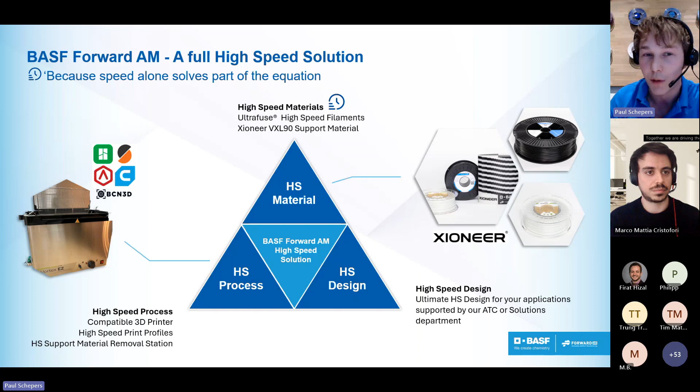And to relieve you, we develop customized print profiles, including customized high-speed print profiles. They're more or less the recipe for your printer to high-speed print the material. That is what we think is a full high-speed solution, because speed alone only solves part of the equation. You need all three pillars.

As already mentioned, today we are going to talk about the ultimate functional PLA, Ultrafuse PLA Tough. The two main UVPs of this product are toughness and high speed. I want to introduce you to those two properties: what is it, how do we evaluate it, and how could it be utilized by you, the customer.

First, toughness. Toughness is actually the resistance to fracture, reflecting how well a material resists cracking or fracturing. If you look at material properties, it could be described by two basic properties: strength and ductility. Strength refers to how much force a material can withstand before it breaks, and ductility is the material's ability to bend and deform without snapping.

So how do we measure it? You see the icon, the hammer, showing impact, and this is how we more or less measure it. We use ISO standard tests, like a Charpy or an Izod test, in conditioned environments, and we move this hammer and smash it into a sample of printed material, then record the measurement. This gives us the amount of energy absorbed by the material before it breaks at the notch, for example a notched or unnotched material. This is how we measure impact toughness.

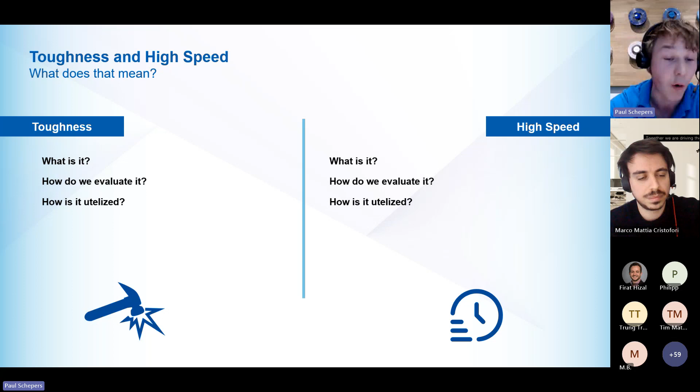Just to record it once again, this icon, when you see it on our Ultrafuse products, means it's able to print at a throughput of at least 8 cubic millimeters per second. But as technology evolves, printing speeds may become even higher, since it's also related to the equipment utilized during the print. We're also looking at the surface quality and mechanical performance of this material when printed at high speed.

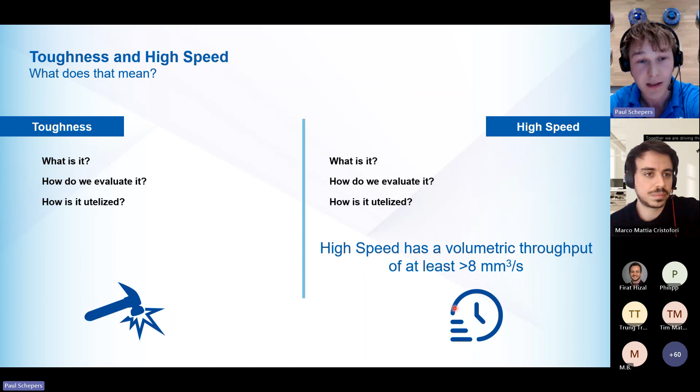So Ultrafuse PLA Tough - why did we develop it? If you have PLA and an ABS material, both have a unique set of properties. PLA is an easy to print material, and ABS has quite some toughness, but they also have some weaknesses.

PLA in general tends to be brittle, meaning it snaps and fractures quite easily. ABS is very tough, however it could warp or delaminate, and it's also fossil based, whereas PLA is bio based. So we wanted to close those two gaps with Ultrafuse PLA Tough, because PLA and ABS together are the major market in FDM.

So what are the superpowers? Ultrafuse PLA Tough is a highly versatile, biocompatible and bio-based material. It's easy to print with, a sustainable and cost and time saving production, especially for large but also fine detailed prints. It's quite suitable for functional applications for beginners, but also for seasoned 3D printer experts.

So what are the 8 superpowers? As already mentioned, it's tough - really tough, with an impact resistance of 34 kilojoules per square meter. We can even enhance those superpowers by annealing it. How does it relate to standard PLA? It's 720% tougher than a standard PLA.

I already talked about high speed - this material can print at this moment with current equipment up to 300 millimeters per second, and maybe with newer technologies it can go even faster.

But it is also biocompatible, meaning it's safe to use on the skin. We've done all kinds of tests to evaluate if there are any allergic reactions, and we have a statement about this. Besides this, it's also crucial that the part looks good - it's aesthetic and visually appealing even when printed at higher speeds. Then there's the heat resistance.

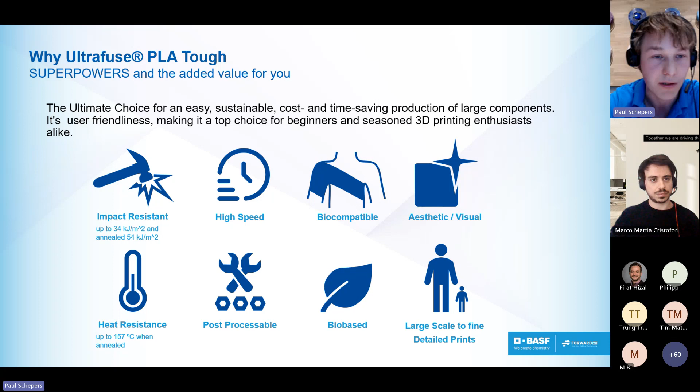It's also post-processable, for example CNC milling, easy to sand, and you can also coat or paint it. It is a bio-based material because PLA, polylactic acid, is derived from corn. It can be used for large scale to fine detail prints. So these are the 8 superpowers, and those add value to you.

Just to summarize, it's 720% tougher than standard PLA. The PLA Tough is able to print at higher speeds with a volumetric flow rate up to 24 cubic millimeters per second, suitable for skin contact, and has a high success rate printing complex geometries, large-scale prints, and fine details.

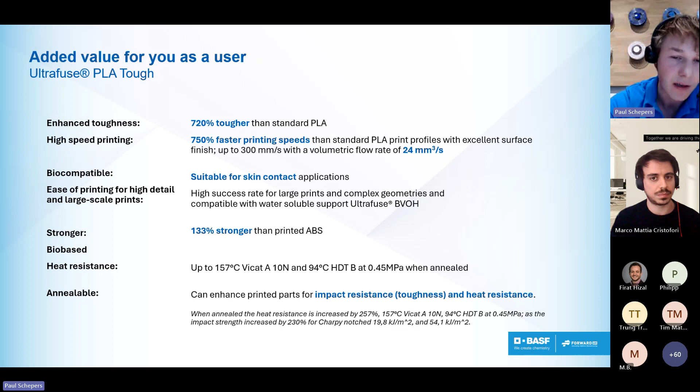It's stronger than ABS, 130% stronger, and it's bio-based. And we can anneal it to enhance its superpowers. Let's look a little bit closer at how this annealing process looks.

When you're printing a part, you print one material next to another, layer on top of each other. What actually happens during this printing is that you get internal stresses built into the design.

So what happens when you heat it? You can anneal the polymer material by a heat treatment that involves subjecting the polymer to a controlled heating and cooling cycle. During this cycle, the internal stresses can be relaxed because the crystals and polymer chains can position themselves in a more favorable state. Because they are in a more favorable state, the properties also enhance—mechanical properties, wear, and thermal properties of the material.

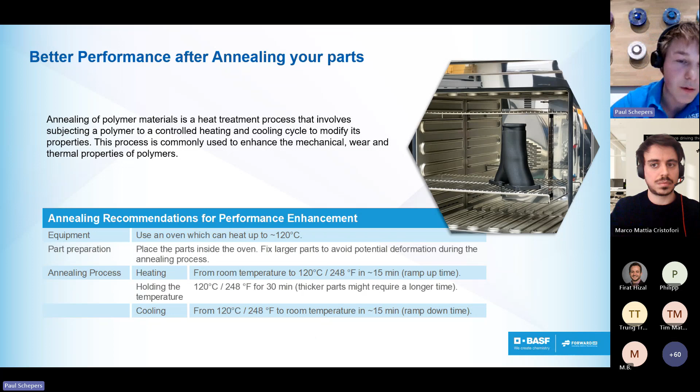We have evaluated this on a particular specimen, and you can look in the technical data sheet for more details about the annealing procedure. So let's look at how these properties are enhanced by annealing it.

On the left, you see how we enhance the thermal properties. In light blue is unannealed PLA Tough, and in darker blue, annealed PLA Tough. For example, at a load of 10 newtons, normally it has heat resistance of about 60 degrees Celsius, but annealed it can resist 157 degrees Celsius—that's almost 260% more. That's a huge increase in thermal properties.

But toughness can also be increased. If you look at the notched and unnotched materials, for the notched version it's about 230% more—a significant increase.

Of course, is it only the superpowers that we can enhance? No, that's not all—there's also a small setback, but one you can control. During annealing, in the different orientations you get a shrinkage or increase in dimensions: shrinkage in the XY orientation is about -1%, and in the Z orientation it's 2%. In the design of your model, you can already account for this shrinkage rate and compensate for it, so the final dimensions of your part are reached after the annealing.

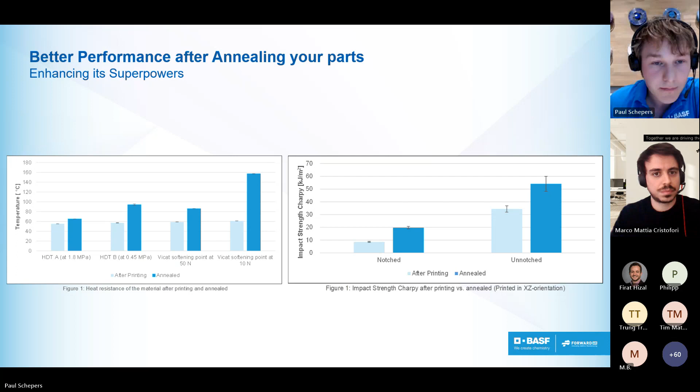So how to choose the right type of material? For those who are aware of our portfolio, you've seen that we offer multiple PLA products and also an ABS. I want to give you a rule of thumb for how to select the right material for your application.

If you want a standard PLA, we offer it for affordable, easy, and colorful 3D prints with no warping, ideal for basic projects and beginners. If you need high speed and excellent surface quality, we advise Pro 1, for top tier 3D printers that demand the best aesthetics. It's slightly tougher than PLA but the fastest to print with no warping, ideal for premium projects. It's also biocompatible and for professional users.

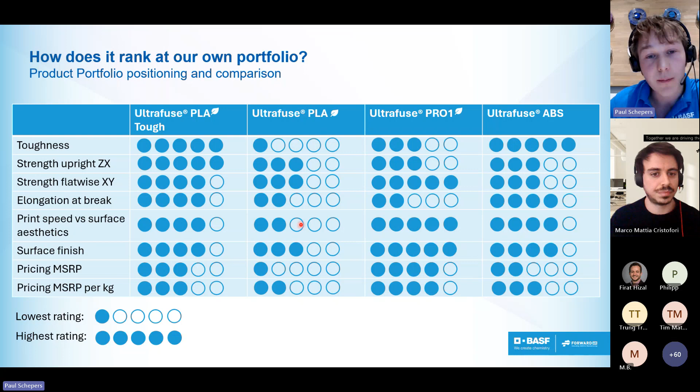Then we have ABS. It's as tough as our PLA Tough. However, if you think about the environment, PLA is a bio-based product and ABS isn't. Furthermore, ABS emits styrene emissions during printing while PLA Tough doesn't, so it's the more sustainable option. You could position PLA Tough between the Ultrafuse PLA and the Pro 1 - it's a more affordable option that gives you all the benefits of an ABS.

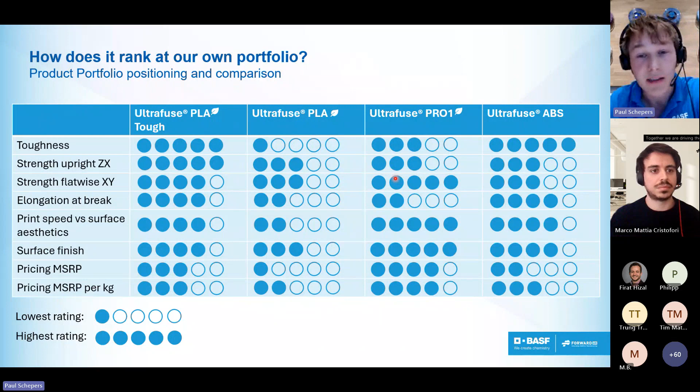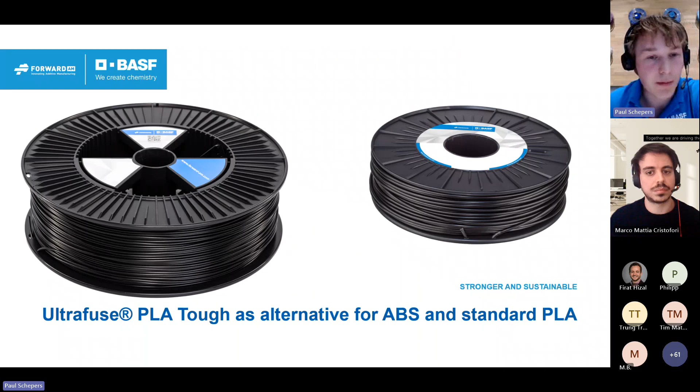Let's have a deep dive into the material properties. What you see here is a spider graph of properties. In general, the larger the surface area of a particular property, the better it is for certain applications, although it depends on the final application field. But in general, the larger the area, the better it's performing.

In blue, we have PLA Tough. We know that PLA and ABS both have limitations - PLA is quite brittle, and ABS isn't the most suitable material if you think about the environment or want to print without styrene emissions. One of the most crucial factors in FDM printing is that if you want very strong parts, you don't want delamination, which occurs quite often in the Z orientation. What you see is that for both PLA, in green, and ABS, in black, PLA Tough is outperforming it, and that's quite unique because that's generally the weakest link of your print.

And if you look at the impact tests, you see that it's outperforming ABS as well - sometimes it's quite close.

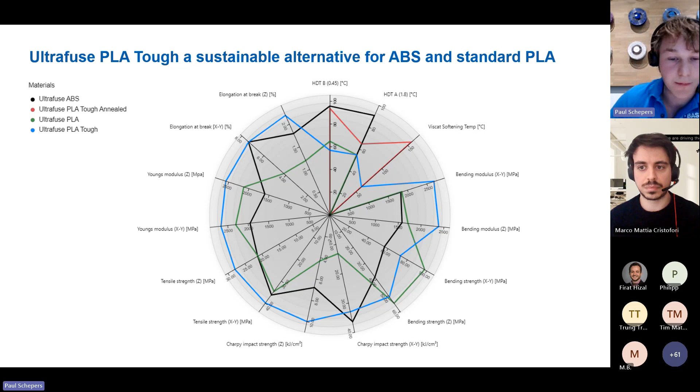Now we come to the topic of presenting some use cases. Although we have many use cases for PLA Tough, unfortunately due to non-disclosure agreements we're not able to showcase them all, but we can show something.

Before we start, I want to share how you as a user can already feel the toughness of this product. When you have the filament in your hands, you can already see and feel it. This is a colleague demonstrating trying to break the filament. For those used to working with PLA, they know how easy it is to break - I sped it up 5 times and you see it's not that easy. You can think about it in a different way too.

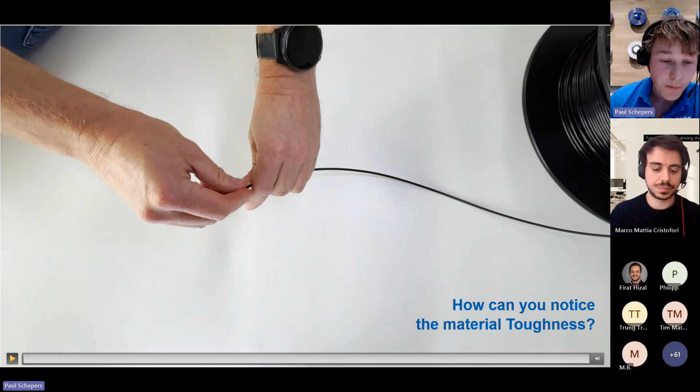In the past slide you've seen the spool sizes from 750 grams up to 8 kilograms, and those big spools are quite heavy. Where do you use these very large reels? Generally for very big, large scale prints. If you need to pull the filament from this heavy spool, you don't want it to snap, especially for a print that takes several days. If it snaps during the print, you may need to print it again. With PLA Tough, it gives an extra piece of reliability that it will not snap during these higher consuming materials in big, large scale prints.

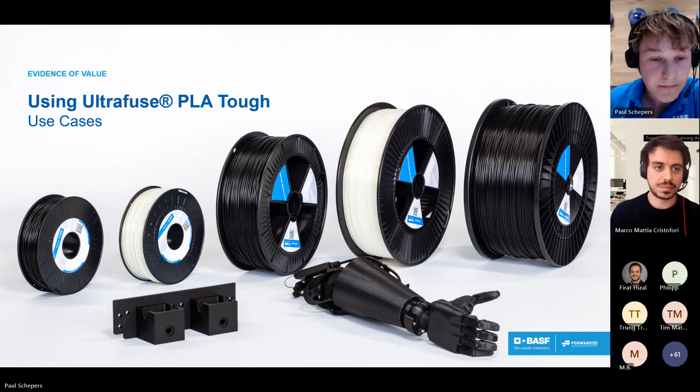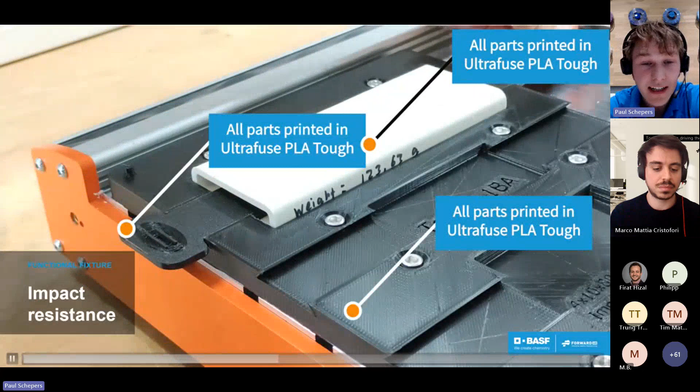So the impact resistance - this is a problem within the company that the material solves. It is a functional fixture, an internal use case where hundreds of parts are CNC milled out of PLA Tough to evaluate material properties. To clamp the parts into the fixture, my colleague hammers wedges into this white PLA Tough substrate to ensure the part won't move during milling. Both the fixture and the wedges are fully operational today, even after hundreds of clampings and hammerings, and they'll continue serving us for a long time.

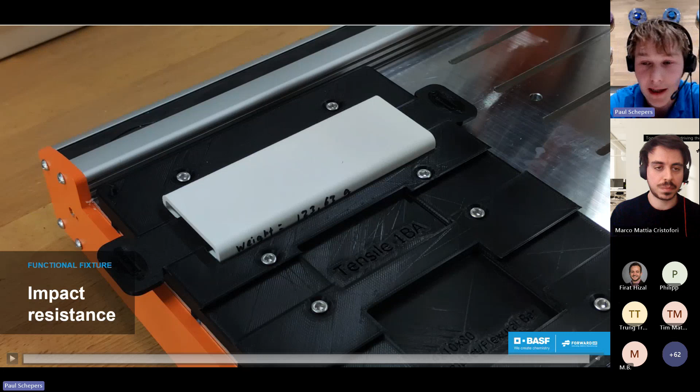And did I mention that PLA Tough is very easy to post-process, like for example CNC milling? It is.

This is a beautiful application from the Victoria Hand Project, a Canadian charity that uses 3D printing to create affordable prosthetic arms for people in need worldwide. Victoria Hand focuses on reaching areas where traditional prosthetic care is limited due to high cost or lack of resources, so their 3D printed prosthetic hands are functional and accessible. For example, the war in Ukraine has left many grappling with devastating injuries, and they support those locations with material, training, and printers so prosthetics can be printed on demand. Victoria Hand helps recipients regain independence, hope, and opportunities to live a happier and more fulfilling life.

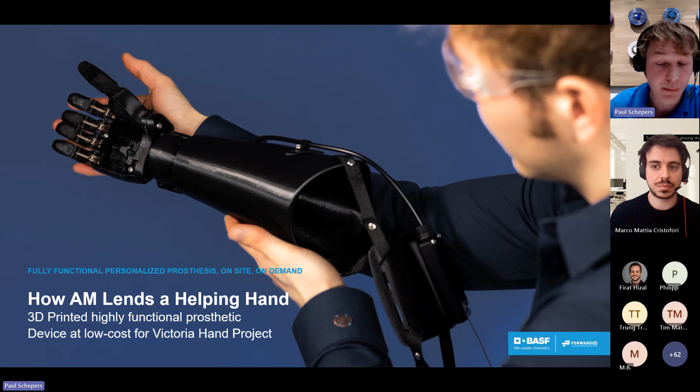This is an example of how a prosthetic is used. Victoria Hand has two main challenges: because they print on demand locally, they need an easy to print material, so PLA Tough is suitable. But it also needs to be durable and strong because it must withstand the daily load cases of everyday wear and tear - from household routines like cooking, cleaning, or grasping an item, like picking up scissors from a table, to playing sports where the prosthetic needs to withstand loads from bumping into somebody. So it's crucial the material is durable enough to handle these activities without breaking or wearing down too quickly.

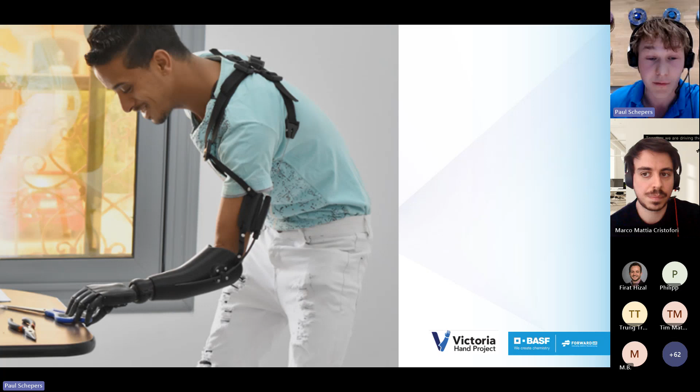Let's have a closer look at these functional applications, because it is the ultimate functional PLA. On top you see a functional design of a rotatable thumb. This rotation achieves different positions, allowing it to grasp different objects from a table.

Then there's a backlock mechanism that lets the user lock the hand to close something - when you click into this backlock mechanism, the hand can hold an item. There's also a composition of multiple materials: you see screws inserted into the PLA Tough, and chains combined with metal parts.

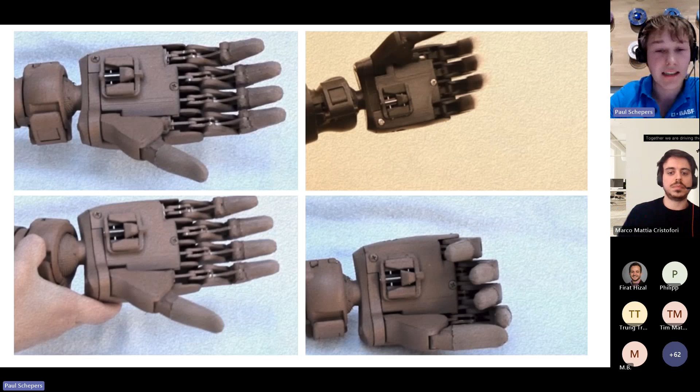Then we have an adjustable or rotatable wrist that locks the hand into different positions, making it easier to pick up parts from a table, for example. And lastly, we have adaptive grasp control - if the shape is a little different, not all fingers move the same distance, but they adjust according to the object.

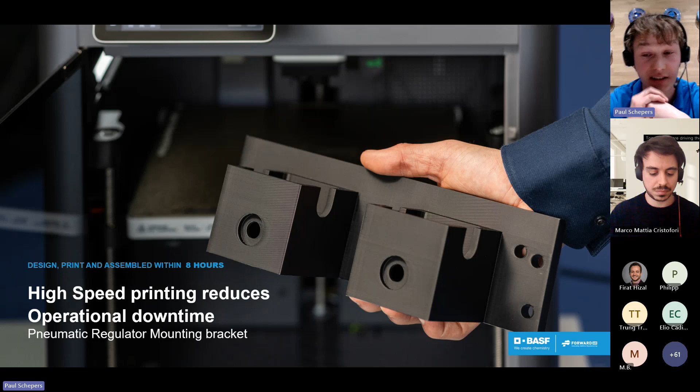This is another use case showing a pneumatic regulator mounting, used in a continuous manufacturing setting where a unique challenge arises: they need to install a pneumatic regulator on new machines within one production shift of 8 hours - quite a tight schedule. Normally you could order such a fixture, but within 8 hours I doubt you'd have the order at your doorstep. So traditional methods proved insufficient, and they switched to 3D printing and our PLA Tough because of its durability and the design freedom of additive manufacturing. So what did they do?

So they were aware that the PLA Tough is high-speed compatible. And what they did is they designed the part from scratch to have these unique cavities designed to mount it directly on the machine, with a unique location. So they are designed for this.

And then the last step is, of course, the assembly on the machine. So all of those steps are done within one working day. That's something you can combine with a high-speed material and additive manufacturing.

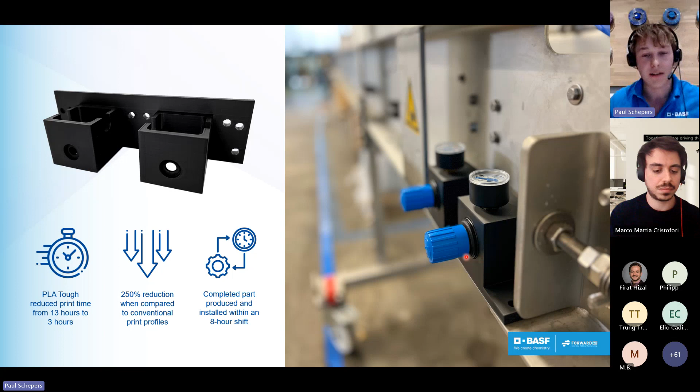So my colleague actually came to the rescue. His neighbor booked a trip to the Atlas Mountains for a mountain biking trip, and he wanted to change his gears to have a more comfortable ride. He already ordered some tools, but when he tried to replace the direct mount chain rings, he ran into a problem. The tool that he had ordered didn't fit.

So this use case shows the potential of additive manufacturing in combination with high-speed printing. It's more or less on demand, within the same hour, creating a more comfortable ride.

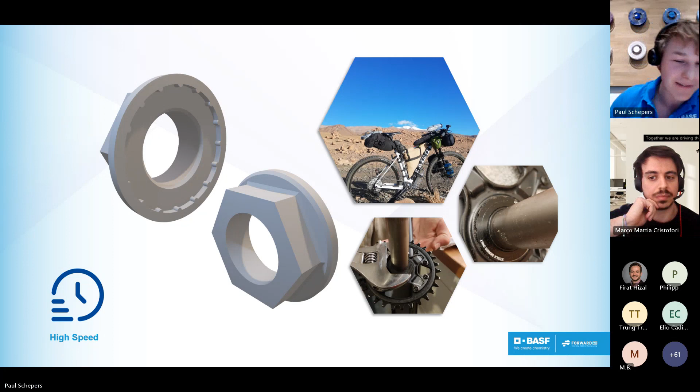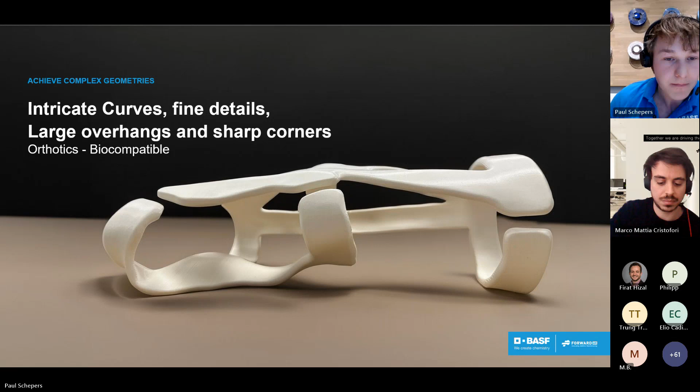So this is the last use case we are going to present. As already mentioned, the PLA Tough is a biocompatible product, meaning it's suitable for skin contact. But it also shows, in this case, fine intricate curves, fine details, large overhangs and sharp corners. So those complex geometries can be printed using our Ultrafuse BVOH support materials, and it just shows you can use PLA Tough for orthotics that need a more rigid material.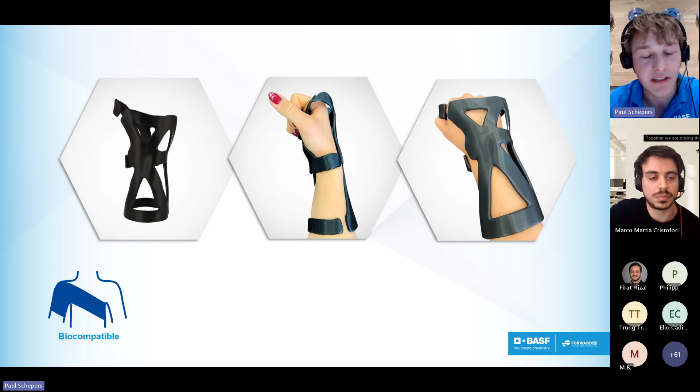So we're coming to the end of the presentation. And as already promised, I would show you a real-life example of how PLA Tough compares to PLA with an impact test. We printed this airless ball multiple times to show you the following.

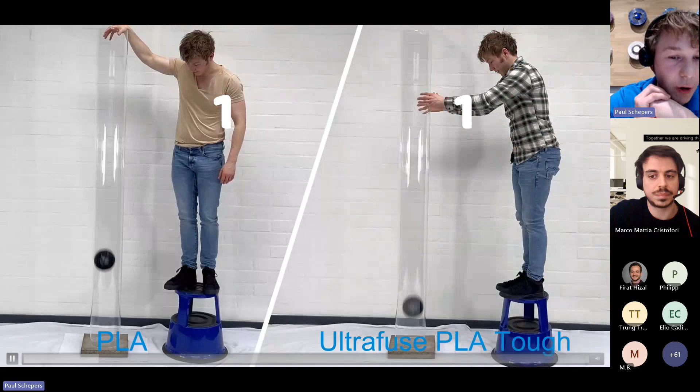So what you see is this translucent, transparent 2-meter high tube, and on the bottom a concrete tile. What I will do is bounce this ball multiple times on this concrete plate, and we will see how the materials behave with respect to each other.

So we are now at 2 versus 2. I'll speed up the video so you don't need to wait forever. Actually, I was expecting the PLA Tough would fail a little bit earlier, but to my surprise it went on for quite a long period of time. At 8 times, the standard PLA fails, and the Ultrafuse PLA Tough is still going strong, almost up to 20 times of dropping the ball. I think it's now time to increase the speed even more, and you could even see this as an exercise.

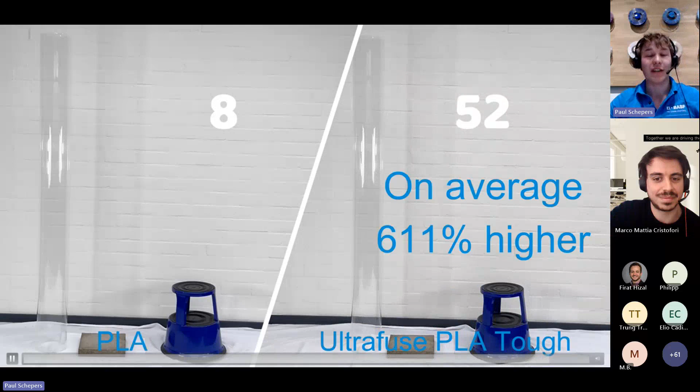At that moment it was time to cool off a little bit. 52 times - 52 times until failure. And we repeated this experiment 3 times. On average, the PLA Tough is 611% higher before it fails. Failure means the ball is not bouncing back because it's fractured on the shell.

So what are the conditions? The ball is about 140 grams plus or minus 2 grams. For those who are into physics, you can do some calculations to determine the loads on the ball.

The height of the tube is 2 meters high, and we repeated the test 3 times. On average, the PLA Tough failed after 26 drops of the ball from a 2-meter height, while the standard PLA only lasted 4 times. This shows how this material could behave in a real life environment, and of course it's quite extreme to drop a ball on a concrete plate from 2 meters high.

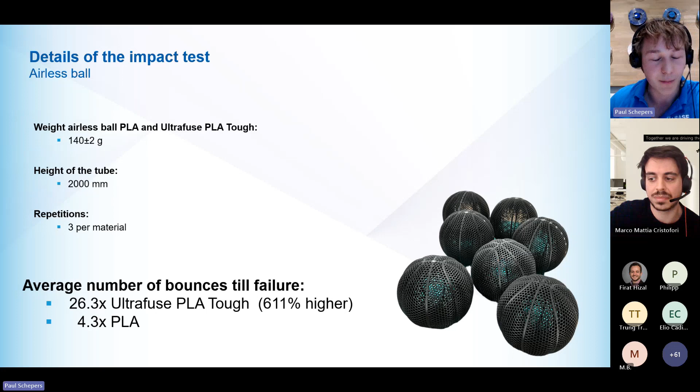So all you need to know for Ultrafuse PLA Tough: it's one of our engineering filaments for those who need a pro material. We offer this product from 750 grams up to 8 kilograms in diameters of 1.75 and 2.85, and at this moment it's available in black and natural color.

And it's available within Europe. But if you are in another region like Americas or Asia, please reach out to your account manager, and we are happy to assist you to get this material in your region as well.

Furthermore, we have print profiles available for many different brands and slicers. So for all of our material print profiles, including other products in PLA Tough, we have those available at our material landing pages on our website. That means all the time and effort that went into creating those profiles is available at your fingertips.

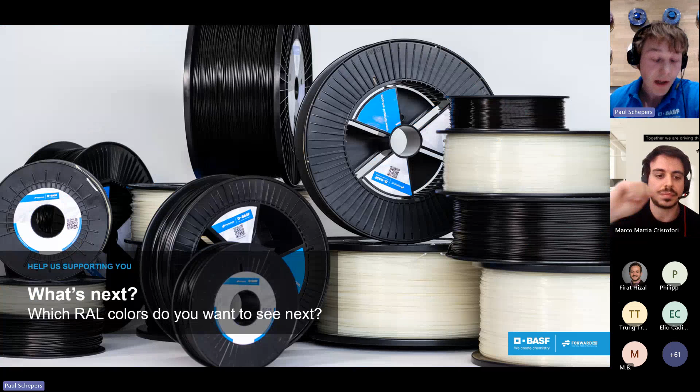So I give back the ball to Marco, and he will ask you some questions before we go into the Q&A session. First of all, Paul, thank you very much, it was a great presentation. I love the video, the comparison — those are always the best way to understand what you mean when you go into technical details. So it works very well.

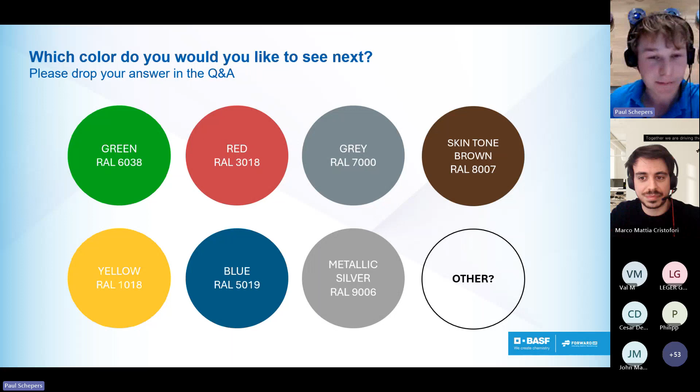And we also have a second question, I already asked one of you: what kind of applications are you using PLA for at the moment, and what applications are you considering Ultrafuse PLA Tough for? We would like to learn from you, so if you develop a new generation of products, we also know the current weaknesses of our portfolio and how we can strengthen new material developments.

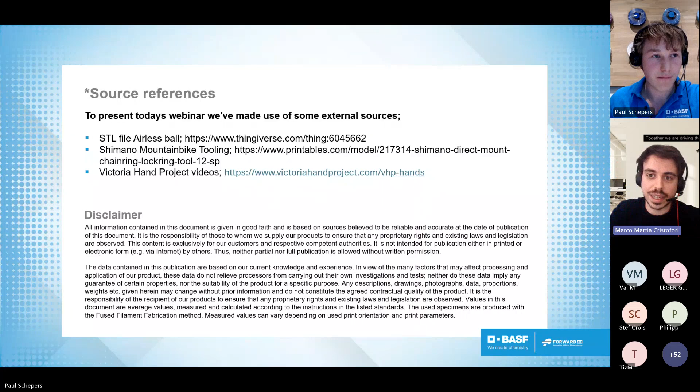Oh, I see it was a question. Well, I guess we will reach out later.